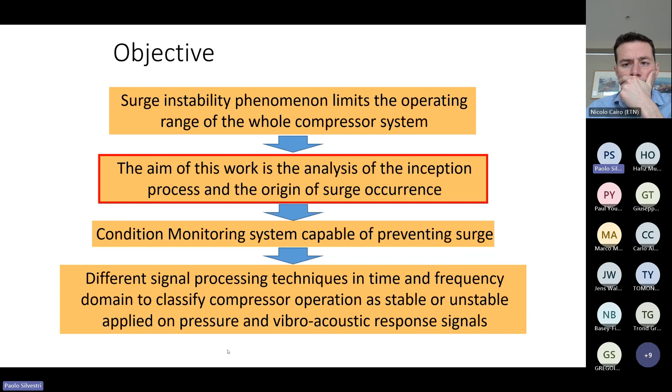The activity is a condition monitoring activity. We have a system, a compressor, and during operation, the system receives input sources exciting it: mechanical sources such as unbalance, fluid dynamic sources, and moreover noise, as we are on field in a real, not mathematical environment, but a real environment. The aim of this activity is to classify an incipient surge condition by observing a specific output from the investigated system, a typical condition monitoring problem.

We have to consider that we can capture the output. In this case it is the monitoring phase of a condition monitoring process. And then we have to interpret the data in order to classify the actual condition of the compressor.

For compressor surge it is important to collect data from the compressor itself, but not only. It is useful also to collect data with coupled other components. For example, in an electric-driven compressor, the identification of surge can also be detected by observing the output from the electric driven motor. So the output generally refers not only to the fluidodynamic machine, the compressor, but to all the coupled mechanisms inside. Moreover, once we collect the data, it is important to classify the condition as stable, incipient, or instability condition.

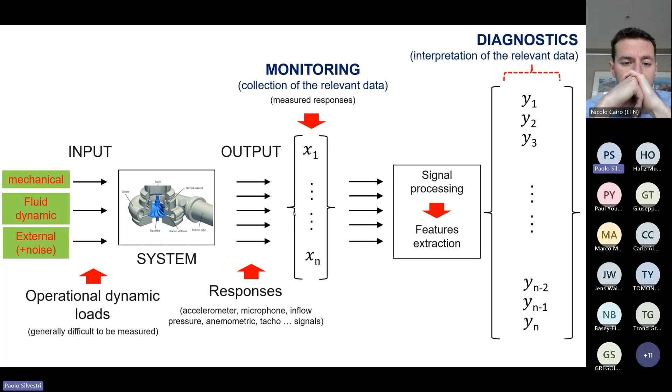I wanted to show you some application cases. The first is related to an automotive turbocharger. In this case, the compressor is driven by a centripetal turbine.

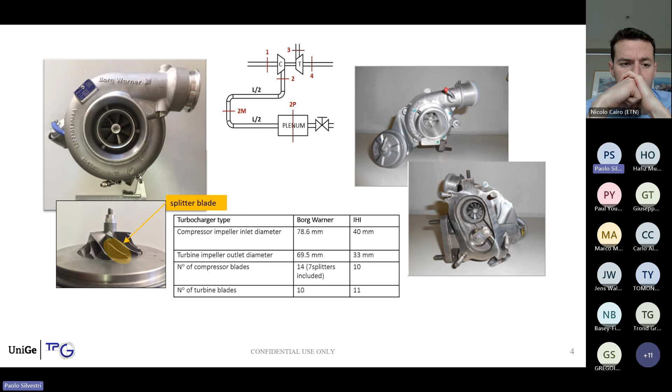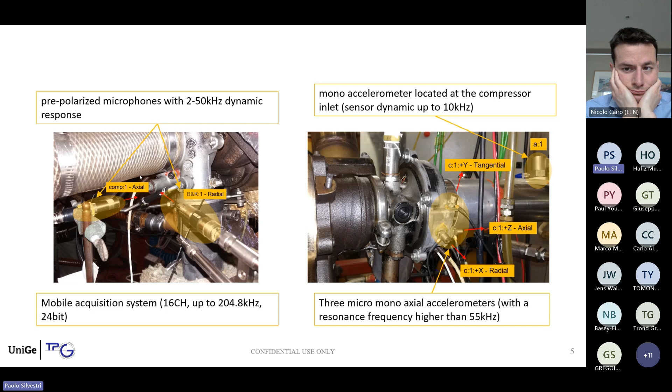I show you surge detection using output captured by accelerometer, microphone, and inflow pressure sensors. In this photo, you can see a microaccelerometer on the right, able to detect high-frequency contents in the structural response up to blade pass frequency.

Before surge detection, it is very important to define the stable signature of a system. If we have a reference condition, we can consider that reference condition and detect approaching surge by observing a deviation of the signature from the reference condition.

This slide puts in evidence a stable condition in terms of acoustic pressure measurement and structural measurement measured with an accelerometer. Please note that, in the case of a centrifugal compressor, the main sources are unbalanced subsynchronous components due to floating ring bearings characterized by whirl phenomena, a typical subsynchronous phenomenon, and blade pass frequency, both of which are well detectable with microphone and also accelerometer.

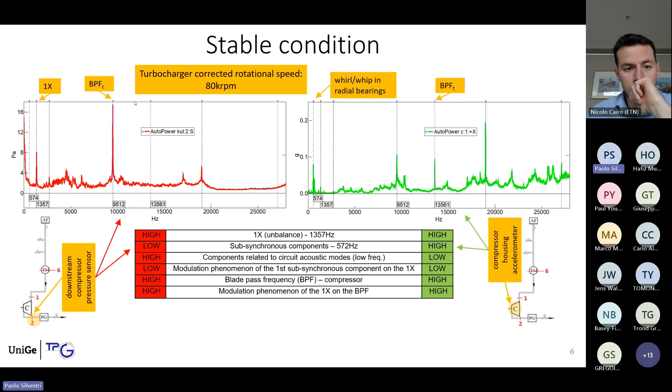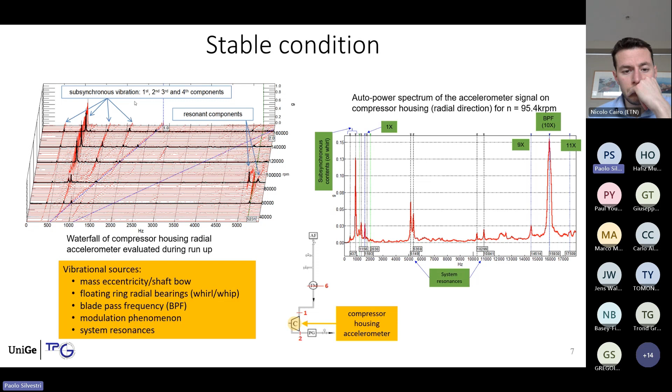Also in this case, you can see spectra not during a stationary condition as in the previous slide, but during a ramp. In this case, we can see that Fourier analysis is able to separate the main sources present in the system in a stable condition, as we are able to detect the frequency content related to unbalance, the synchronous one, blade pass frequency, and resonances. So frequency analysis, FFT, is able to well detect the main sources acting on the system.

Now we can switch to surge identification, and I want to present steady test and transient test. Steady tests are characterized by constant reduced rotational velocity of a compressor at steady condition characterized by reducing of mass flow rate, so approaching surge line. Transient was conducted keeping the throttle valve in the feeding line of a compressor in the same position and increasing the compressor rotational speed, starting from a stable condition to an unstable one of a compressor.

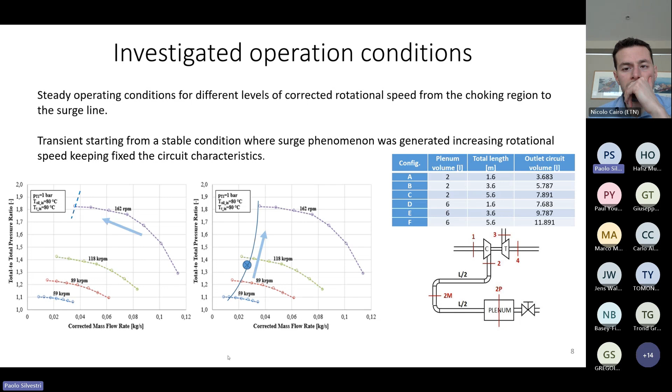So subsynchronous energy in system response is good for surge detection, as its energy increases approaching surge. Please take into account that these tests are at a specific test bench used to characterize compressor behavior. It is a conditioning environment. In real tests, this frequency range is usually contaminated by contribution from other external sources of the complex plant. So this approach works fine in the low frequency range in laboratory tests, but may be critical in field measurement.

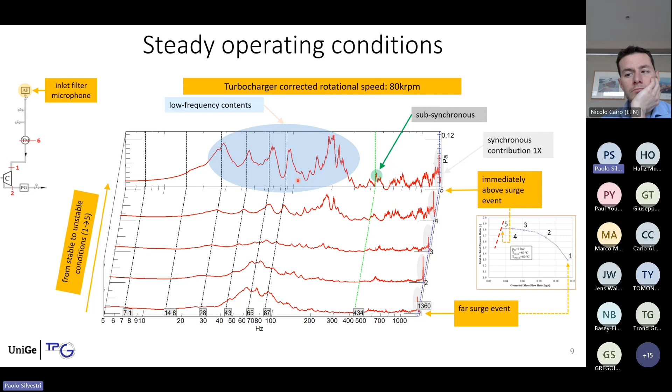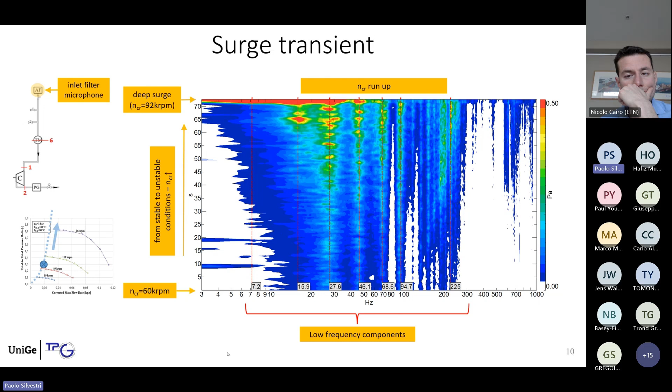Here you can see exclusively the subsynchronous contents. The vertical axis is the throughput time of the measurement of the test, and we are approaching a surge line. Please note how this energy increases in a significant way approaching surge. The same is seen from this other measurement. So the subsynchronous range is good, but may be contaminated by other contributions.

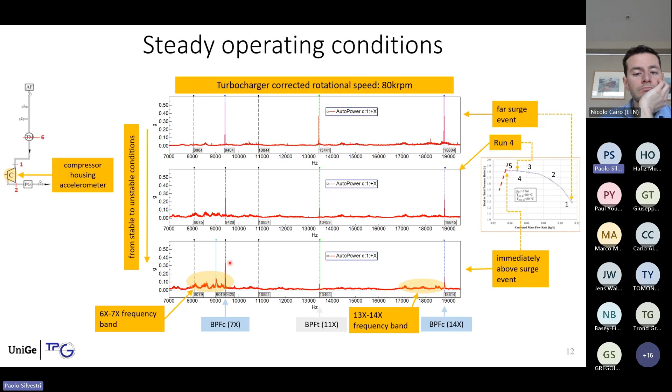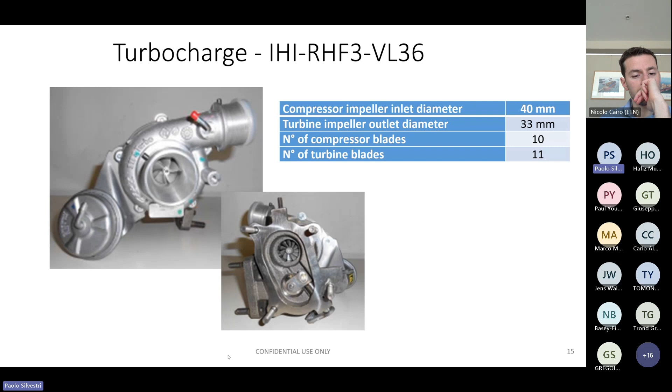I show you another application. Our aim is to identify the surge. We considered, also in this case, a compressor turbocharger, and we use the cross-correlation function. Cross-correlation function is a time domain function, and we use cross-correlation to separate contributions in the measured output.

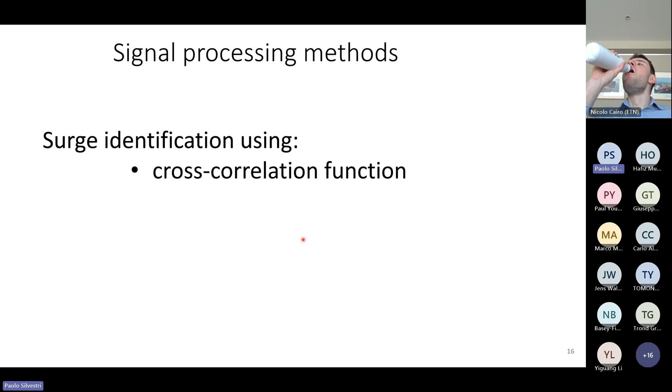In this case, we considered the inflow pressure signal. Cross-correlation allows separation of the deterministic contents from the random contents. As is known, cross-correlation is an operation that quantifies the similarity between two signals as a function of the delay of one relative to the other.

In the case of the pressure signal, it allows characterization and quantification of wave propagation phenomena in the duct, by analyzing a particular pattern in one sensor signal that recurs in a second sensor placed at a specific distance from the first. Near surge, significant pressure oscillation originates, and in this way we want to detect the rise of this energy with cross-correlation.

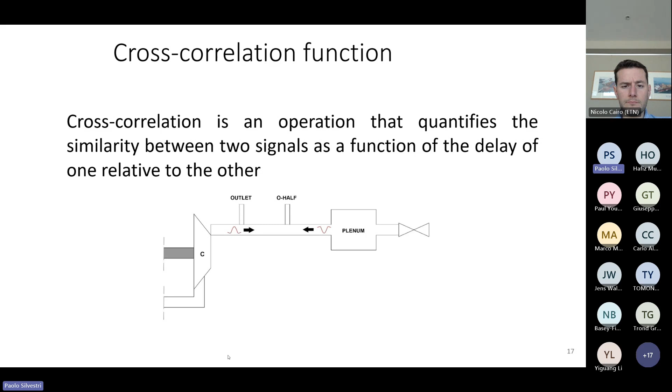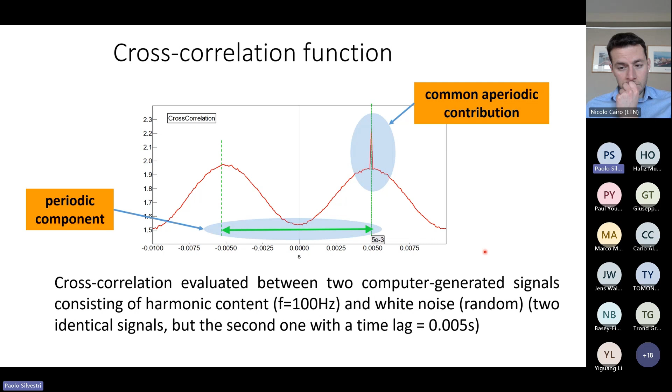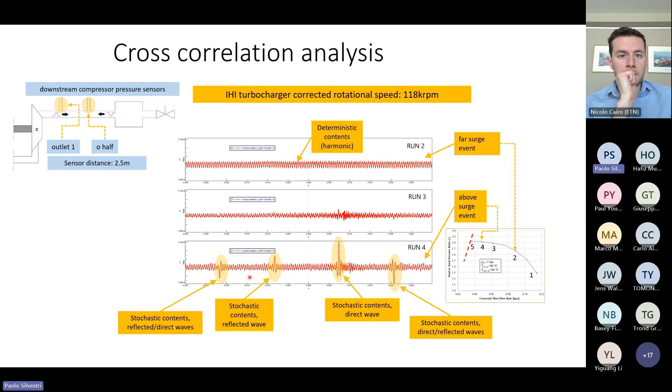The last approach is based on kurtosis. Our aim is to acquire data and separate in the acquired data the contents that may be related to surge. Spectral kurtosis is able to separate the deterministic contents, the random contents, in this case the random stationary contents, for example Gaussian noise, and the transient random contents. Kurtosis is a statistical tool based on the moment of order 4, and is very sensitive to extreme events.

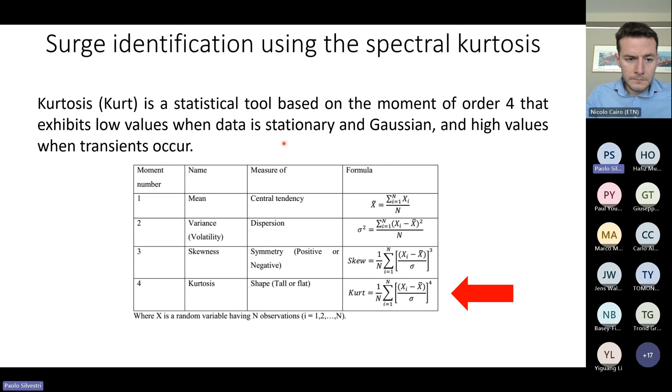So burst response, and in surge, extreme events may occur at low mass flow rate. The impeller flow incidence is not optimal, so a lot of burst response, a lot of energy in terms of burst response, is present. Our approach is to try to separate the burst contents in the acquired signal. Generally these contents are covered by noise or other contributions.

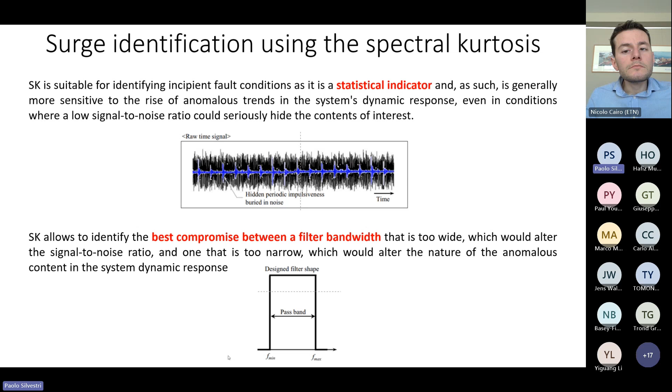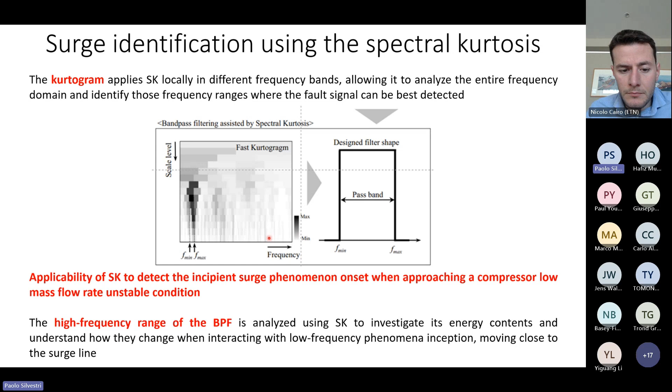So the approach based on kurtosis, and in particular spectral kurtosis, allows us to explore the frequency acquisition band and obtain the optimal band pass filter which maximizes the impulsiveness and transient characteristic in the measured response. The final result is reported here. Please note that the application of spectral kurtosis identifies the frequency band more sensitive to burst contents, the one centered on the blade pass frequency, with a bandwidth equal to the range of the oscillation mass in the duct of the compressor.

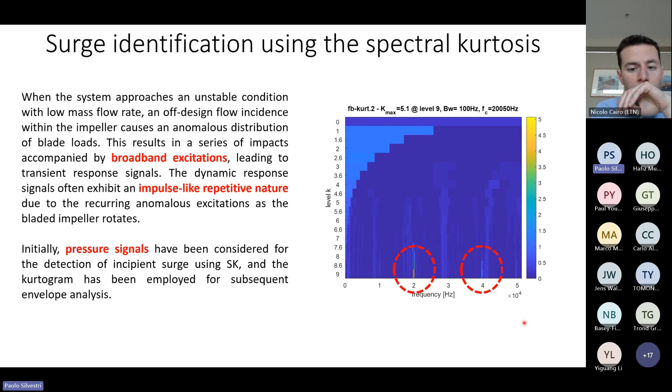If we consider this specific content of the filtered signal, we note what is reported in this slide. In this case, instead of the filtered signal, we consider the envelope, the FFT of the envelope of the filtered signal. Here we can extract some periodicity in terms of modulation of the central frequency, in this case the blade pass frequency. Please note that in stable condition, the FFT of the envelope presents no specific peak.

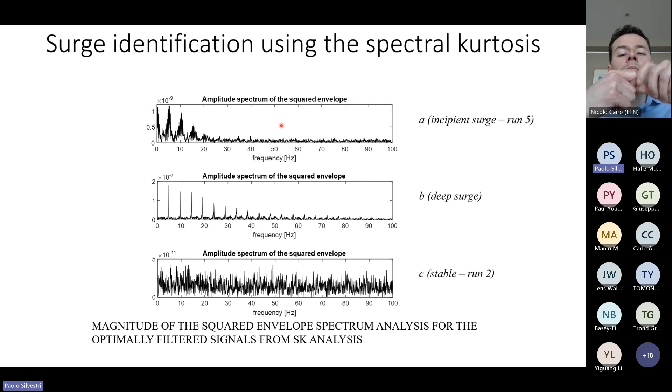In deep surge, what happens? The filtered content is characterized by a modulation at very low frequency, 5 Hertz. This means there is an interaction between blade pass frequency and oscillation mass phenomena, and this interaction is also observable not only in deep surge, but in incipient surge—see the upper spectrum. So with spectral kurtosis, we are able to separate deterministic from random contents, and inside the random contents, also the transient random contents, not just stationary. This is very useful for surge detection.

Spectral kurtosis was used on inflow pressure signal, but also using accelerometer signal. The accelerometer signal is more difficult, as the structure acts as a filter, so it's more difficult to detect the surge. Accelerometers are simpler for their application. This method works also using structural response vibration signal.

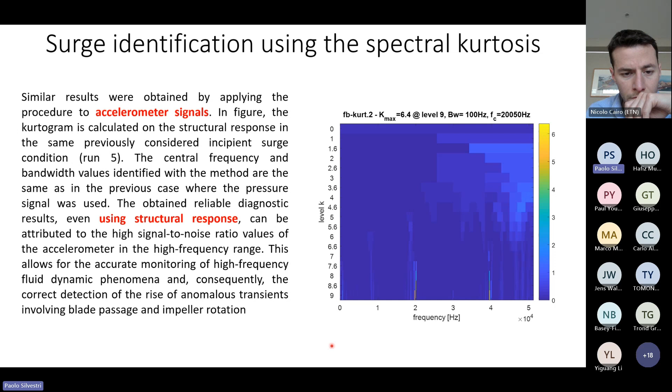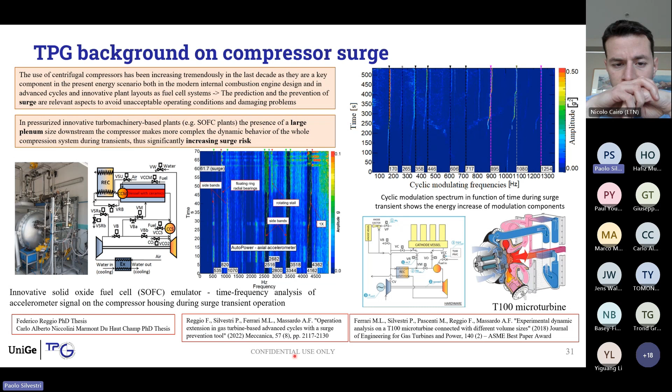I think that's all from my side. We used this method in a test bench, but also in real plants, in particular on two fuel cell emulators, with encouraging and good results, and publications are available. Thank you for the attention.

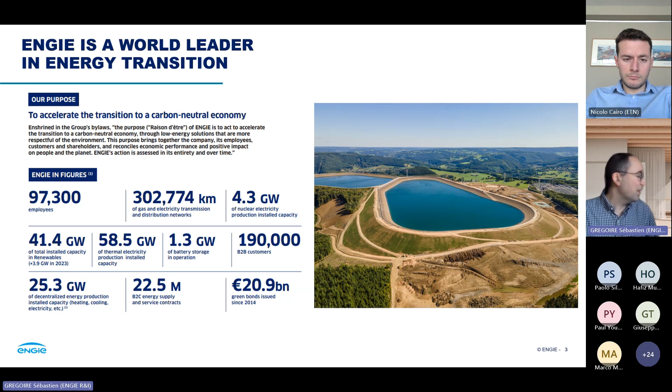The thermal capacity is around 60 gigawatts. And decentralized energy production, on-site generation, is around 25 gigawatts.

The goal of ENGIE is to have net zero carbon in 2045. And to achieve that, we are structured in 4 GBUs. Today I will mainly speak about the first one that you have on the slide here: the renewable and the flex power GBU.

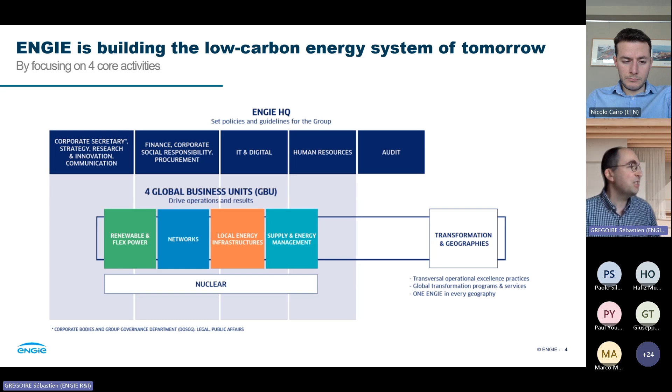Next to that, you have networks, local energy infrastructure, and supply and energy management. So if we go to flexible generation, we have there some challenges in the coming years.

So first one is the BESS, the battery energy storage system. Those BESS are driven by the big spread in energy price on short term.

You probably know it happens quite often that the electricity prices are negative during the day when there is a lot of wind and a lot of sun, and then a few hours later the prices are up again. So those BESS can profit from that by storing energy when the price of electricity is low, and then delivering the energy when the price is higher.

H2, we are also active at a slower pace, but it needs to be monitored as well.

The flexibility is also a challenge for us, because if you look in the past, the CCGT, the classical power plant, the role of them was a provider of electricity, while now it's more a provider of capacity and flexibility to complement the renewables. It's the renewables that dictate the market, and the classical assets must be flexible to complement that.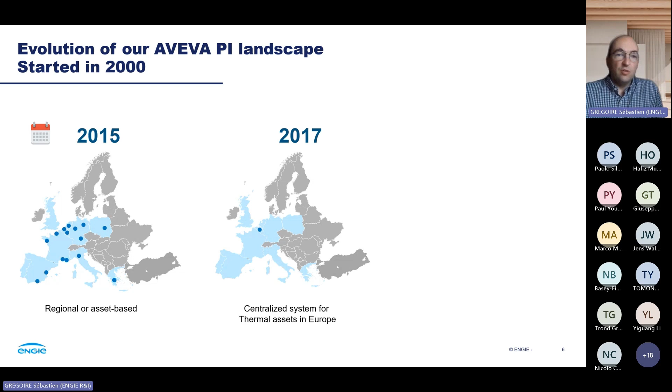So in 2017, we centralized all the European servers in one unique server located in Belgium. All the assets of Europe were connected to this unique server. We saw, of course, the advantage of it from an infrastructure point of view - that means only one server to maintain.

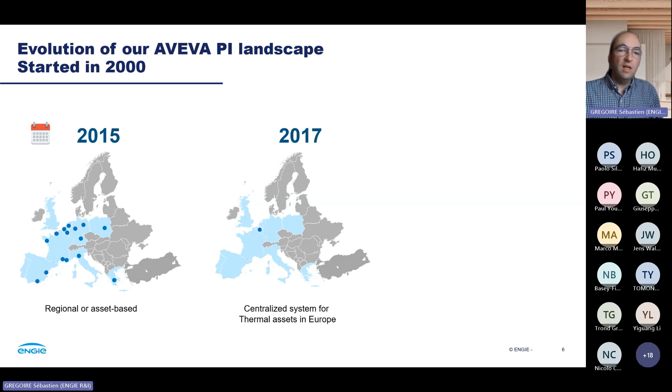But the biggest asset value was from the user's perspective, because it was much more easy to share the experience between the different users, since they all had access to the same server and the same data. That led to the next step in 2019: one server made available worldwide for all plants of ENGIE, which we branded Robin. So when I speak about Robin in this presentation, that's the name we gave to our historian based on the AVEVA PI.

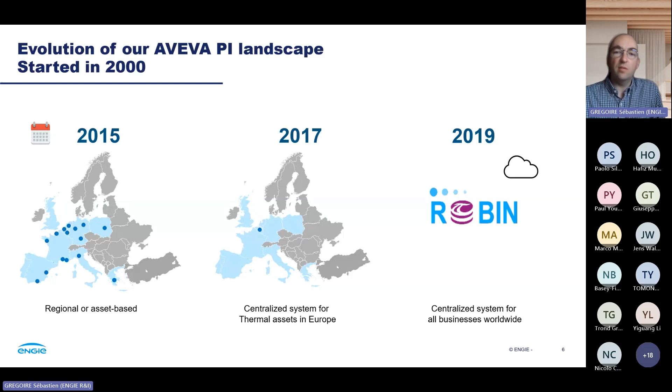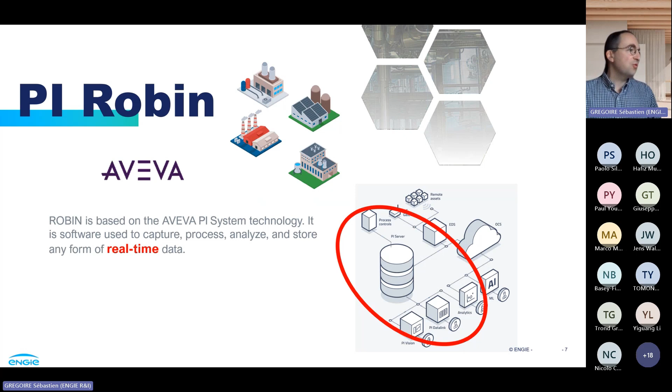So I said it, the PI Robin is based on the AVEVA PI. It's a software used to capture, process, analyze, and store any form of real-time data.

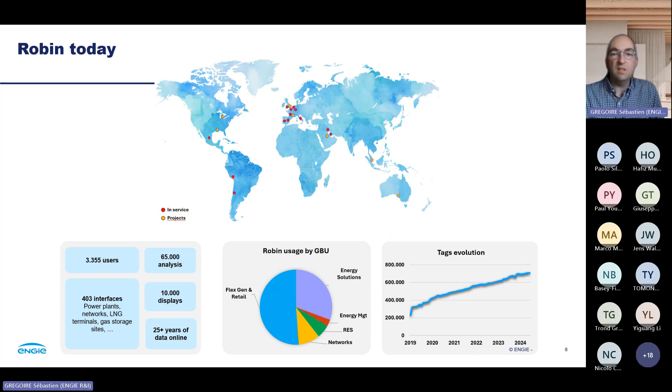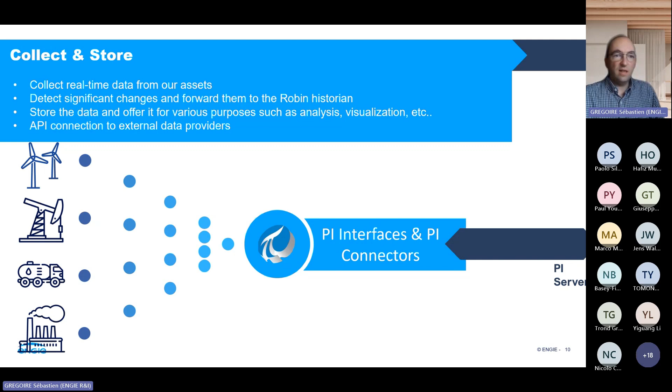So the concept: we get the signals from our assets, and they go in real time into the PI historian. I'll go quickly through these slides to keep time. The signals go into the PI interface and PI connector, and are stored on the server. Then we have real-time analysis, with some analysis done in the PI server itself as data comes in, to create alerts in case of events or incidents, so the experts are aware of it.

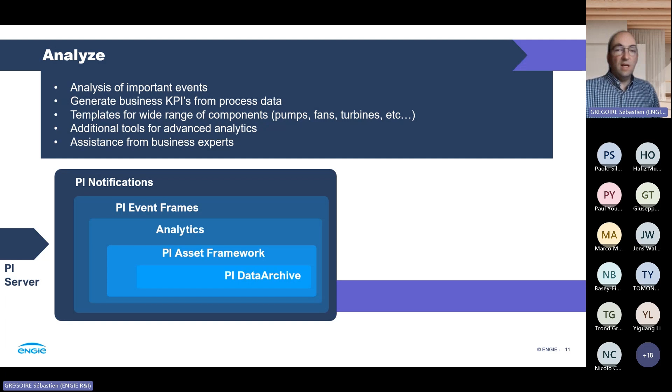And then next to that, we have different tools available for analysis. We use the PI Visualization Suite, some KPIs in Power BI, a Python library for data scientists, and other tools for experts to perform analysis based on this data.

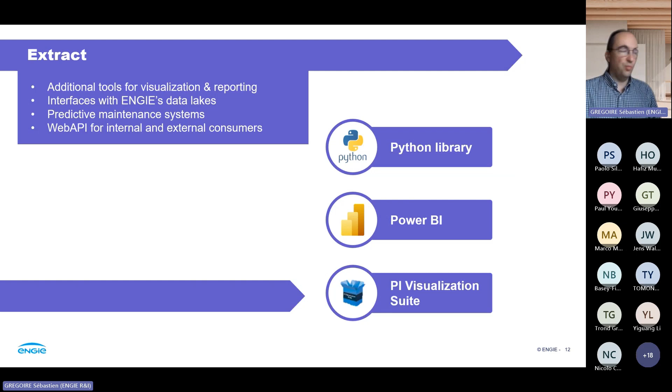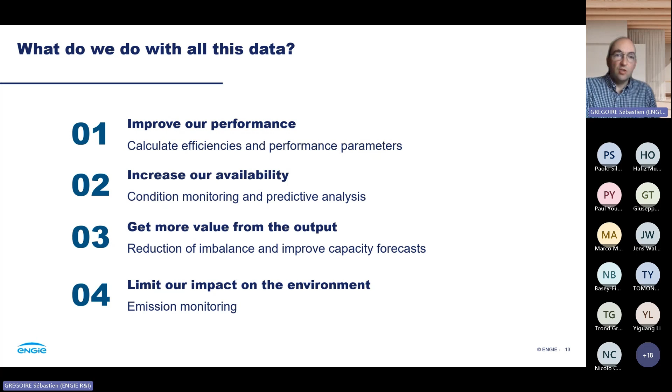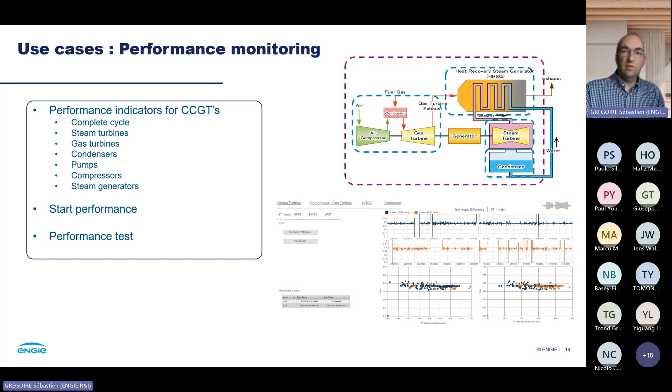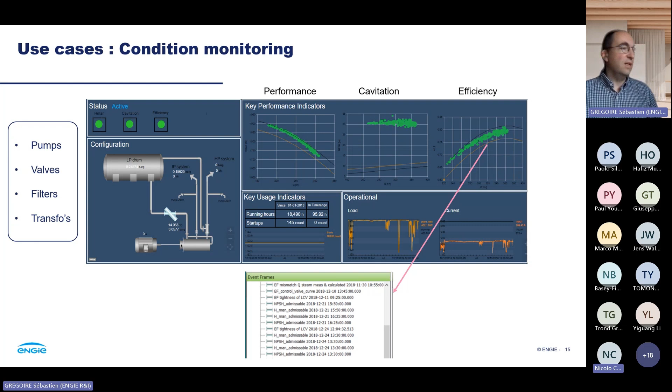The orange line is the tolerance - that means what we accept without raising a flag. And the green dots are the real operation points. So if we have a deviation, if a point falls outside of the curve, then we create what we call an event frame. That's created automatically, and the concerned expert receives an email with this event frame and the reason for what's happening. Then he can easily go to this event frame, analyze what's wrong with the equipment, and proceed further with the expertise and the solution.

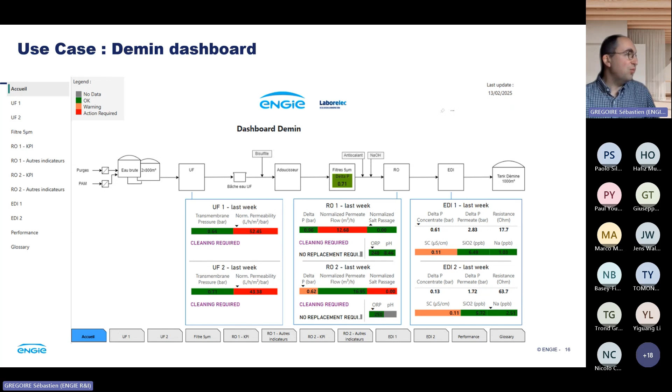Another case is the DEMIN dashboard. In CCGT, we need to produce some demineralized water, so for that we have the DEMIN installation. We have also made a dashboard about the status of this installation so the operator can see if everything is running as it should, or if some maintenance is needed to improve efficiency.

So now I will focus for the remaining part of this presentation on vibration monitoring. I will start with a brief history of vibration monitoring at ENGIE.

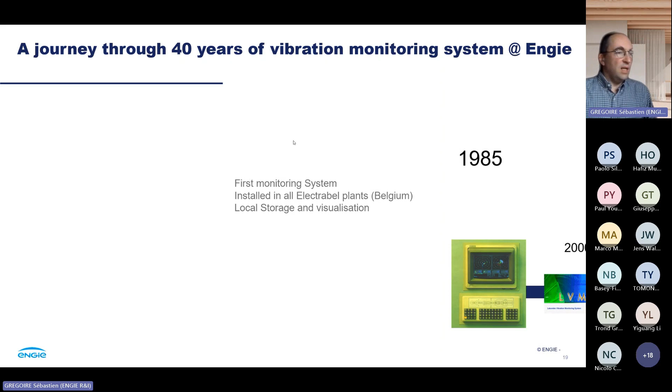Then in 2000, we developed the Laborelec vibration monitoring system. Laborelec is a subsidiary of ENGIE and is the research department of ENGIE, also providing support for operational excellence. We developed this system with remote capability.

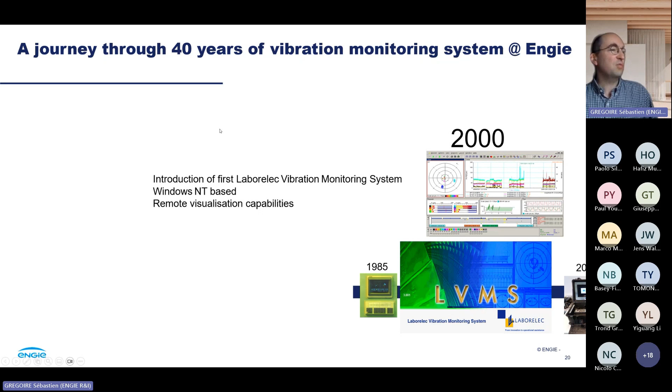It was Windows NT based, and already at that time the expert could follow the vibration behavior in the power plant from their offices in Brussels, but also on the road with a GPRS connection. It was not very fast, but it was working, so it was possible to do all the follow-up remotely.

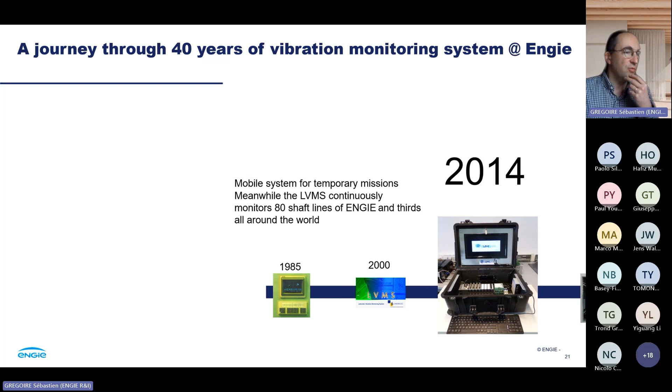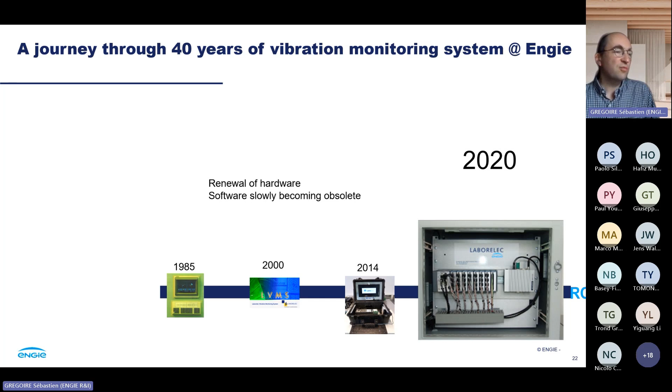In 2014, we developed a portable system for temporary missions. At that time, the LVMS was monitoring 80 shaft lines of ENGIE, but also third companies around the world. In 2020, we replaced all the hardware of the 2000 installation with new hardware based on National Instruments CompactRIO, but the software was still the same as in 2000. It had some evolution, but the base was still the same, and so was not compliant anymore with cyber security requirements, and also needed to improve the software. So we had to do something to renew the software.

For that, we developed the Robin vibration monitoring, which is based on the data in Pi. We have there a web-based application for live visualization, and all the storage happens on the Robin platform.

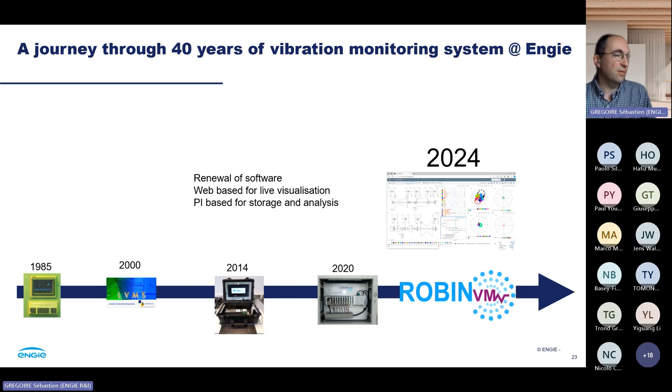Briefly, a small crash course on vibration monitoring. To do vibration monitoring on fluid film bearings, you don't need a very high acquisition frequency. Of course, you need to do some signal analysis and FFT, but most of the case, 90%, can be analyzed by looking at the first harmonic component, the component at the rotational speed. You look at the amplitude and phase of this component and of the second harmonic, the global value and the DC value of the sensor. With that information, you can solve 90% of the vibration analysis, and then you will need the FFT, the time signal and orbit for the last 10%.

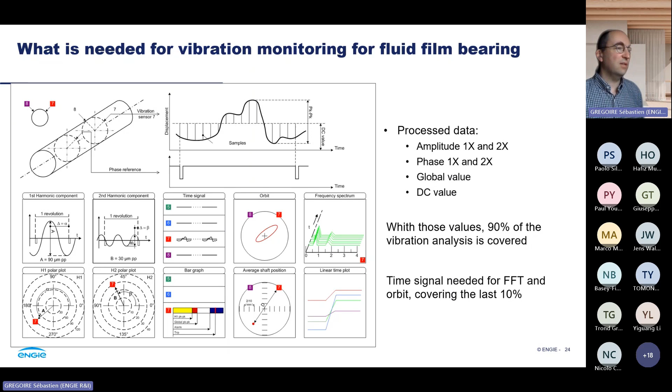But most of the analysis can be done with those parameters, and those parameters can be stored in the Robin Pi historian. So vibration analysis, how does that work?

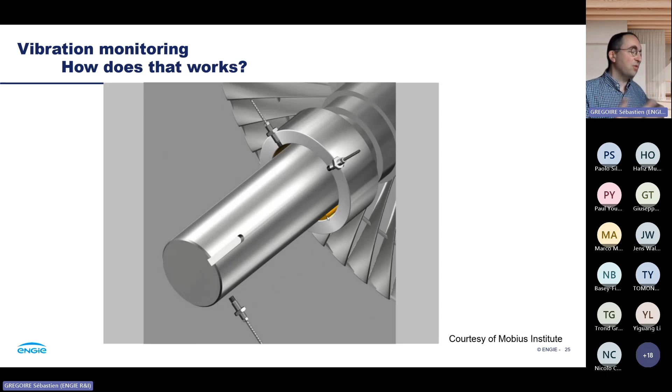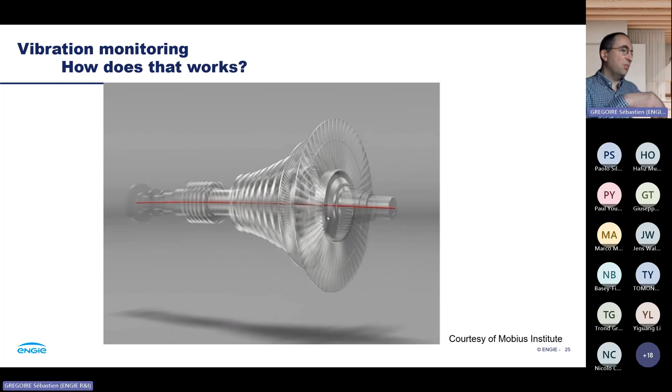You have here, for instance, a shaft with two proximity sensors. One sensor is called the phase reference, with a groove on the shaft, and the sensor will give one point per revolution to give the phase of the vibration, so that the expert can know in which direction the rotor is turning. When the rotor is running, you have this kind of movement, and by placing a sensor at the bearing location, you can measure the movement of the rotor in the bearing, and the expert can then use this information to interpret the vibration.

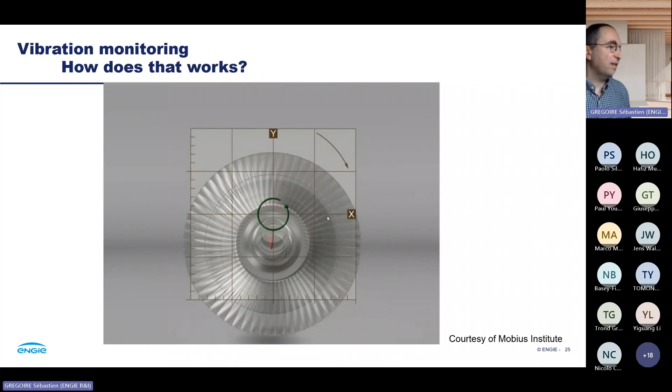So what you see here is the orbit with the dot marking the moment of the phase reference. And if you place the sensor at a different location around the shaft line, you can then see the mode shape of the shaft line and go further, using it in your analysis.

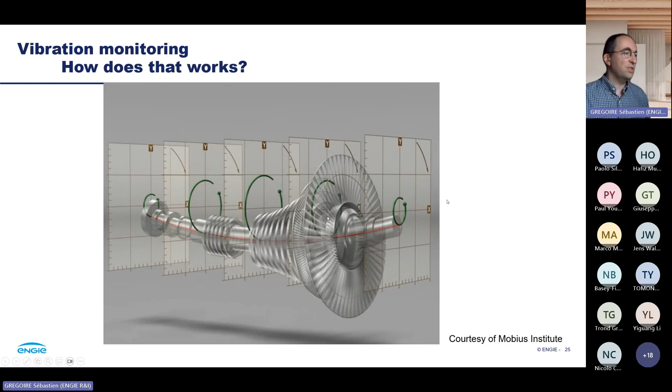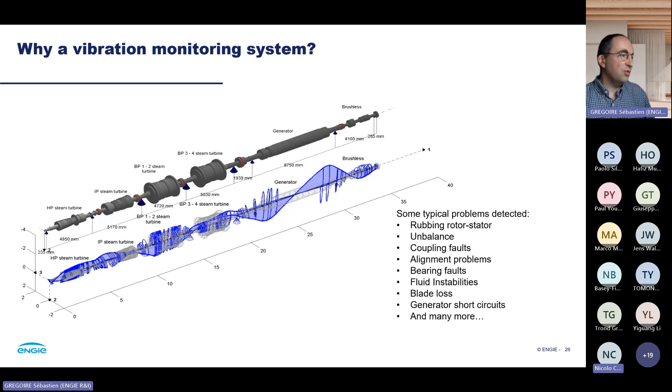So why do we do vibration analysis? Because thanks to that, we can detect problems like rubbing rotor stator, unbalance, coupling fault, alignment fault, bearing fault, and so on. Also generator short circuit—even if it's an electrical cause, it will have an effect on the mechanical state of the unit, and so you will see it in the vibration behavior.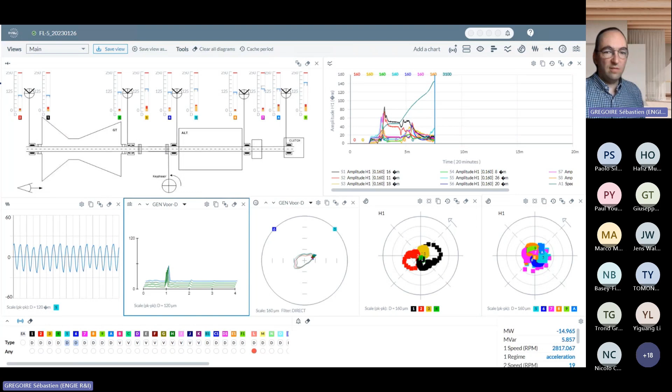And then next to that, we have the offline view. The difference here is you see the time bar that shows the operation mode of the unit. In blue, that's the nominal speed of the unit. In yellow, you're on turning gear, so when the unit is not used. And in gray, when the unit is stopped. So we can see here a long stop period with an overhaul.

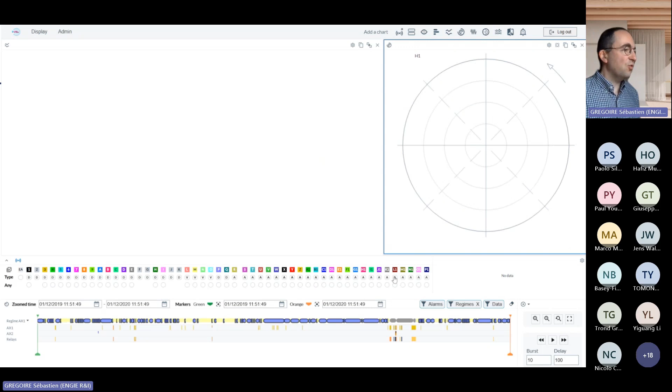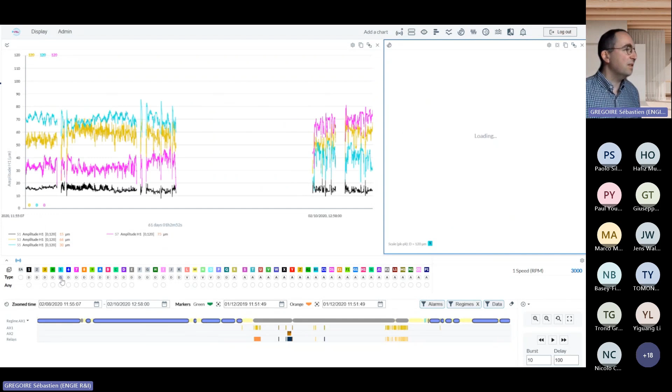So I can easily select, for instance, all nominal regime during this period of one year, and after a few seconds I have the linear diagram with the trend of some sensor that I had pre-configured. You can see here, for instance, that there is a change in the blue line and the magenta one, so I can select those sensors and show them in the polar diagram.

So in this case, I will have a look at what's happening during an acceleration before the overhaul with sensors 5 and 7, and after the overhaul. By comparing both, we can see that the behavior of the cyan sensor before the overhaul is the one of the magenta sensor after the overhaul, and vice versa. So in fact it's not really a vibration issue, but it's just that the instrumentation guy has probably misconnected the sensor during the overhaul, and so swapped those sensors.

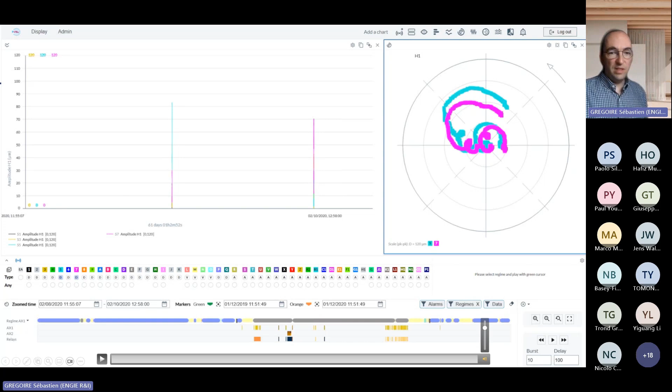And so this is, I think, my last slide. Thank you for listening.